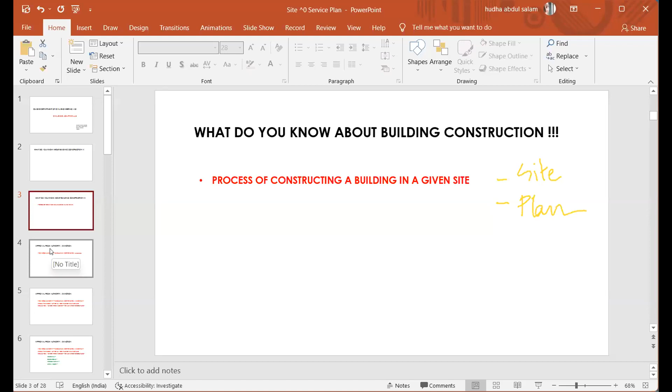Our drawing must satisfy KBR if the construction work is happening in Kerala. Yeah, if it is in Kerala, you need to satisfy the KBR. Now it is known as KMBR or KPBR. I will explain the full form. That is correct, okay, that much is correct.

So basically, you need to get the approval from your local authority. Whatever the local authority is, you need to get the sanction or approval from them. It can be panchayat or it can be corporation. In Kerala, what is the other one? Like one more thing other than panchayat and corporation. Do you know? It is municipality. Okay, so this is the local authority. From the local authority, you need to get sanction for the construction of your building.

In Kerala, basically in India itself, we have three kinds of local authorities. If the plot you are going to build on belongs to a panchayat area, you need to take permission from the panchayat. If it belongs to a corporation, take permission from the corporation. And if it is in a municipality, you need permission from the municipality. This is for a medium-sized small building. Depending upon the size of the building and its occupancy, you need to come up with other approvals also.

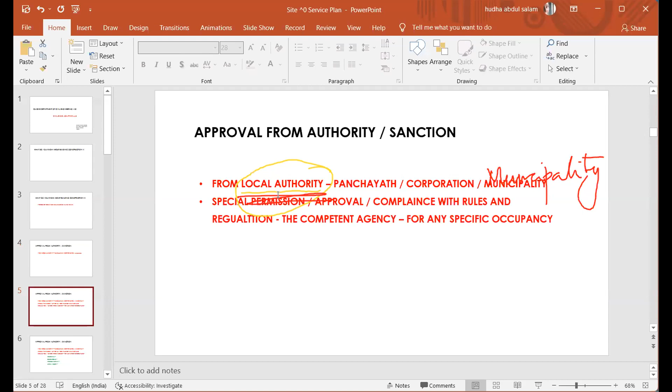Apart from local authority permissions, you need to take special permissions depending upon the occupancy. Any understanding about that? Have you heard about this thing before? Someone, anyone? Yes.

So you don't know, maybe. For a normal residential building itself, if it exceeds a certain limit of area, you can't directly take approval from the local authority. You need to go to the town planning department first. With a consent from the local authority, you need to take permission from the town planner, higher authorities. But then, depending upon the occupancy, your building should also comply with the regulations of that particular occupancy guidelines.

For example, if you are going for a residential building, it will be a normal local authority sanction, or maybe from a town planning department. If it is a villa or an apartment which exceeds a certain limit of area, you can go for town planning department permission.

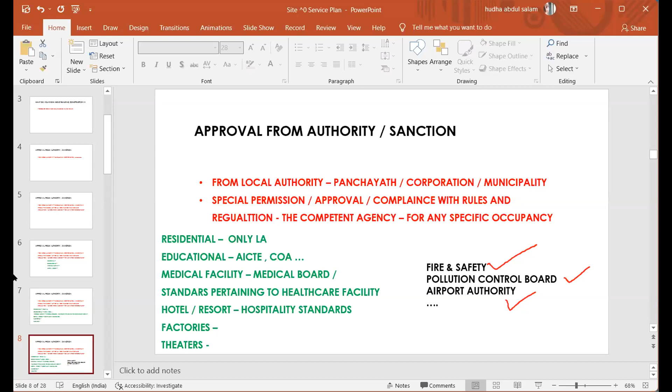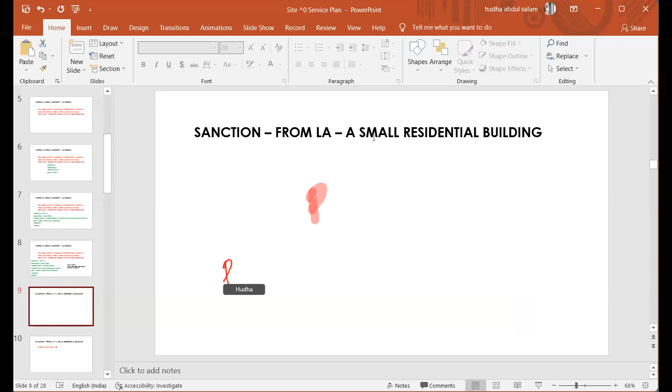So let us check what is needed for a small residential building from local authority. You just need it from the local authority. The local authority can be a panchayat.

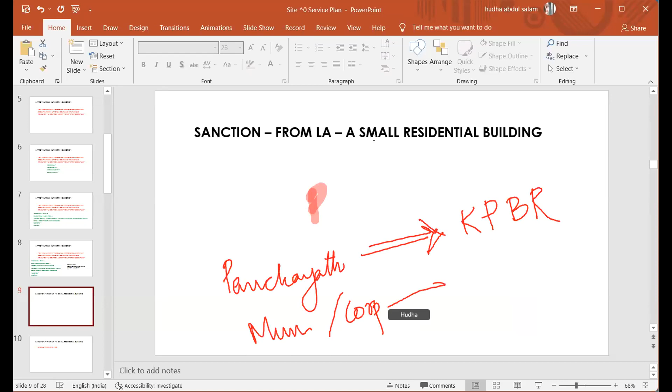You need to follow KPBR. What is KPBR? Kerala Panchayat Building Rules. If it is a municipality or corporation, you can go for KMBR, Kerala Municipal Building Rules.

And in the full form - usually before it was just KBR, Kerala Building Rules. But then in a later stage, they divided it particularly for the panchayats and separately for the municipality and corporation. So we do have two rules, KPBR and KMBR, depending upon the location of the site. If it is in a panchayat area and the local authority controlling that site is panchayat, you need to follow the KPBR. And if it is municipality or corporation, you can follow KMBR.

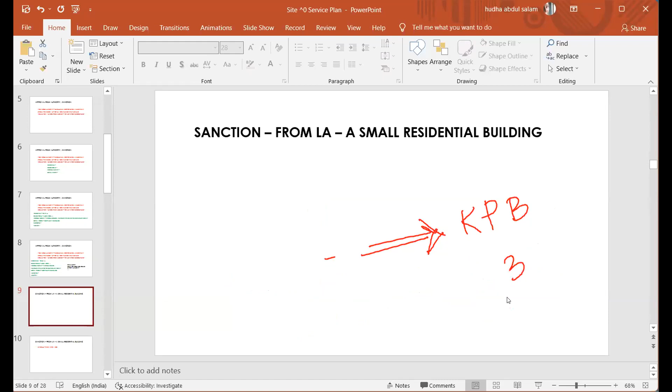And one more thing is there - it is the NBC. As it is within India, all over India, you need to follow NBC. NBC, the full form is National Building Code. The updated one - whenever you check the rules, whether it is KMBR, KPBR or NBC, whatever it is, you need to check the updated version of these rules. These rules keep on amending in between. So whenever you take them, make sure that you are taking the updated one, the latest version of rules.

So next question, we do have these different rule books. Are these rules all the same in all three? Actually, the answer is no. In some cases it will be same, and in some cases it will be different for different rules. So if you take any particular rule, you may have two different sets of rules in your two different rule books.

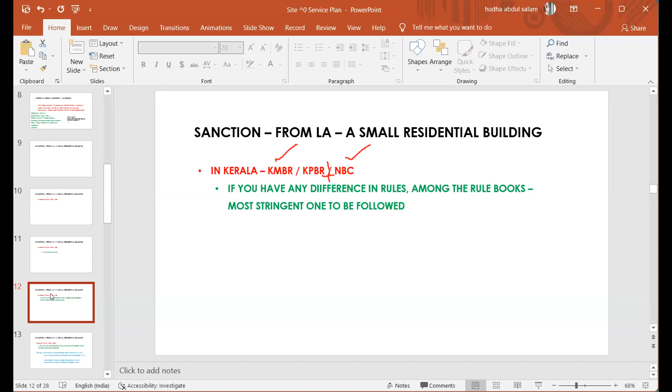In Kerala, you need to follow KMBR or KPBR plus NBC. These two should be followed in Kerala. When we take KMBR and NBC together, if there's some difference in rules, you need to go for the most stringent one. For example, this is not the actual rule, I'm just writing it down as an example. Minimum distance from side boundary as per NBC is given as 3.5 meters, and as per KMBR it is 3 meters. Which one will you follow?

As per NBC it is 3.5 meter, the minimum distance of a site. For example, if this is your site, this is the front boundary from the road, and you are going to place your building like this. So this is the minimum front setback, or the distance from the side boundary in the front yard. That minimum is given as 3.5 meters in your NBC, and 3 meters in your KMBR. Which will you follow? Which can be followed is 3.5.

I hope you understood the logic behind that. It is very simple. If you go for 3.5 meters, automatically you are giving minimum of 3 meters, so that it abides by the rule of KMBR as well. So whatever is the stringent rule, you need to follow that. And another example is about maximum, when we think of the maximum dimension or maximum thing given in a rule.

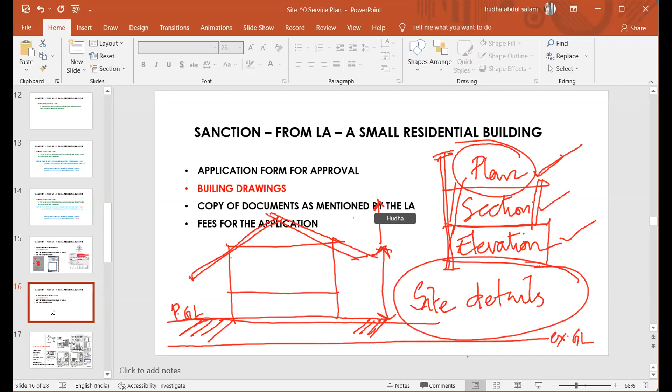This will be checked from your elevation. From your section, it will be somewhat similar to the elevation, but along with the ground level and heights, you need to show the foundation details. So we are now discussing the section. In the section you need to show details like the foundation details.

Heights obviously will be there in the section, because in floor plans you can't show the heights or the different floors. All these things will come in your section plan.

Heights, and specifications like whatever materials you are using for the building construction, such as the wall material, the roof material, the floor material, etc. All the specifications should be shown in your section, along with each floor height and the slab thickness in between. All these things will be taken from your section part.

So that is about your floor plans. Anyway, you need to show all of it, just excuse me for a second.

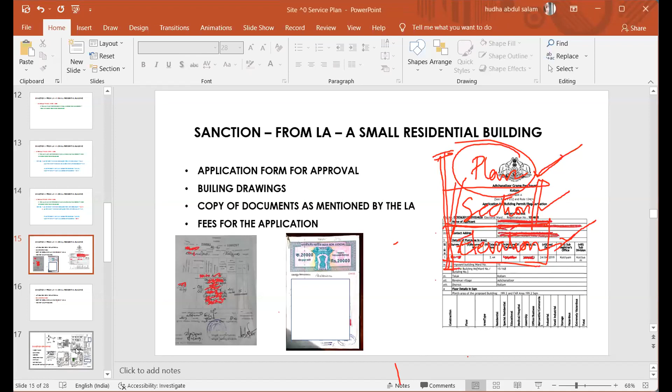Okay, I'm sorry for that, I've got a call. Yeah, am I audible?

Yes ma'am, okay. So it's about the plan, elevation, and section. All these things need to be there in your sanction file. Other than that, you need to show your site plan and services and details of your auxiliary structure.

So basically, you need to show all these details: floor plans, plans of your different floors with the openings, windows, everything with dimensions like this. Different floor plans, your elevation, then your section, and then you need to show the specifications.

Here the specifications are marked, then the foundation detail. In some cases, depending upon the secretary in the local authority who is giving your approval, they might ask for a detailed foundation drawing. In that case, you need to give an additional drawing with the details of your foundation.

Other than that, the important thing is your site plan, service plan, and the details of auxiliary structures and service structures within your site. So we can learn more about these two things in today's class.

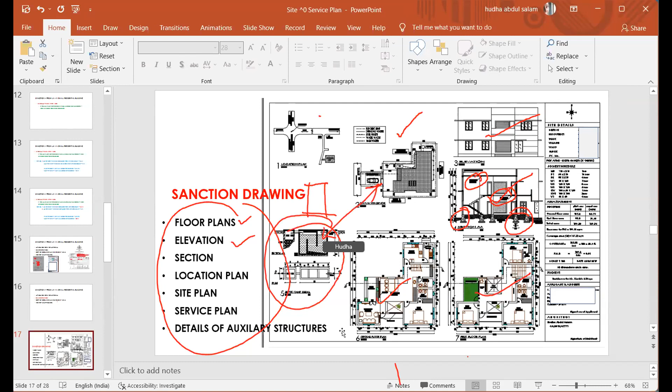Okay. So basically, what all things will be there in a site plan? Again, the site plan. What all things will be there in a site plan? Hello, someone please respond.

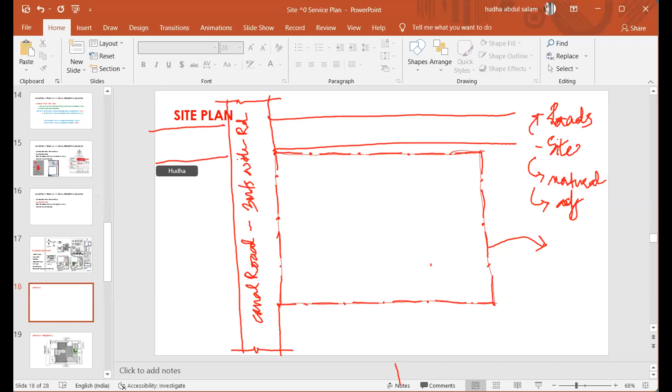Canal is going adjacent to your plot, mark that and mention that it is a canal. And if you have any name for that canal, name that also. For example, maybe Perandur Canal. That name of the canal can be named.

So with this, the basic thing about your site is done. Other than that, you have 2 more sides for your site, isn't it? You need to mark the detail on that side also.

Maybe I have a residential building adjacent to my plot on this side, mention that: Residence of Mr. so and so. And if there is another site here and the building is here, or maybe it is a vacant plot, you can just write vacant plot. And if possible, if you can collect the survey number of this vacant plot, just mention that also.

These things should be there. So your raw site is ready. And into that site, for making it a site plan, you need to add your building footprint.

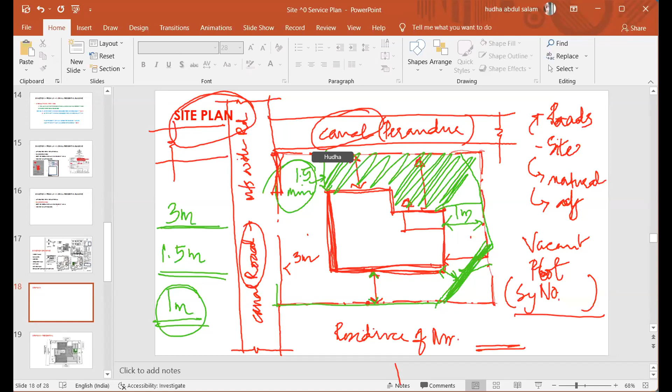So basically, within the site plan, you need to show your roads, whatever adjacent features are coming, then the proposed building plan. Usually, the roof plan will be kept, the proposed building footprint, and the setbacks from all the side boundaries should be shown.

If it is more than the minimum, what will it be like, let it be 1.75 meters, you can show that 1.75 meters. The actual should be shown, but then mark the minimums here. These are just the minimum. What is actually there in the site, that should be marked. It will be clear once I show you a proper sanction drawing.

And the adjacent properties, if it is a residence, that can be given. For a more accurate thing, you can give the residential number also, like this way we have given the survey number. This is not mandatory. In some cases, if the adjacent property owner is not willing to share the survey number or residential number, it's okay, leave it. But then you can just mark it as the residence of Mr. whatever.

So that is all about your site plan. Just quickly brush through the details of the site plan.

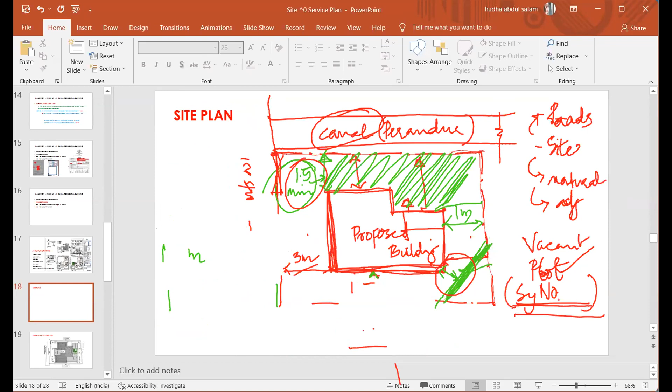Clear all options, sorry. So this was a site plan prepared for a small residential building. It is a single story.

Hello, somebody was asking something. Okay, this particular drawing is a combined drawing of site and service plan, so you could see a few things that we haven't discussed already. That will be there, we are going to discuss it in the next session.

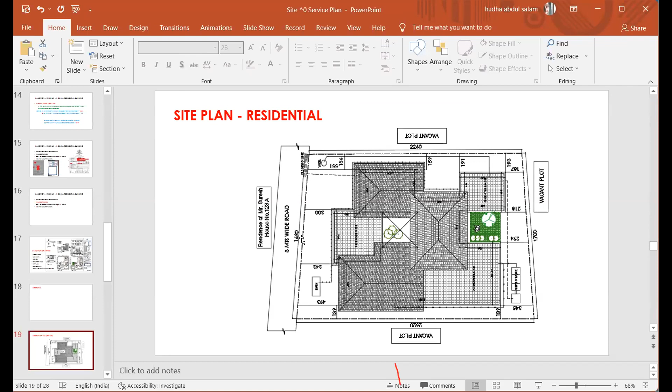I think I can open the AutoCAD drawing so that it is more clear and I can zoom into further details. One second.

Is it clear so far? Do you have any doubts in between? It's clear, ma'am, all clear.

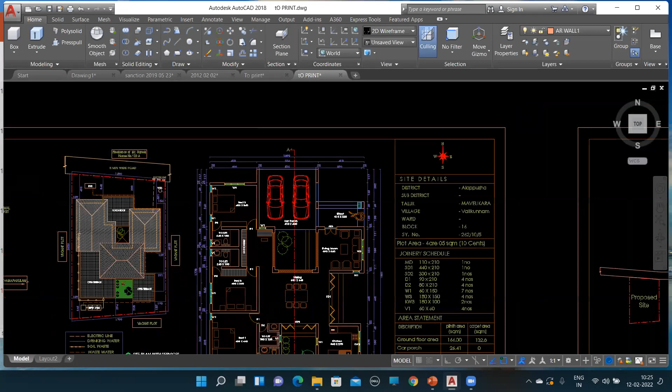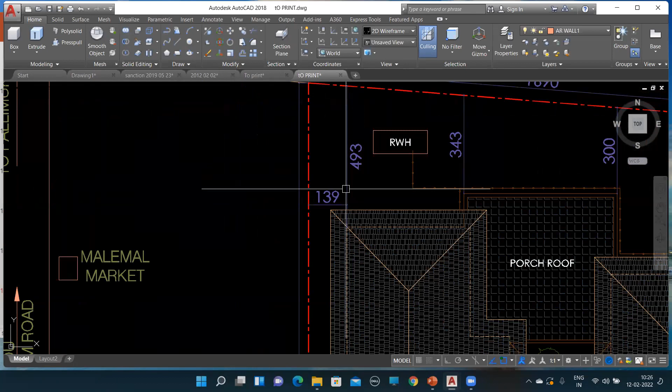So this is the plan I was showing. Again, you can see here—this is the boundary line, the boundary marking. 493 is the setback here, setback from the plot boundary. This is the road, a 3-meter wide road, and from that road you have 493 centimeters to your building. This is the roof plan I've shown in the drawing—the roof edge, the barana, the roof edge.

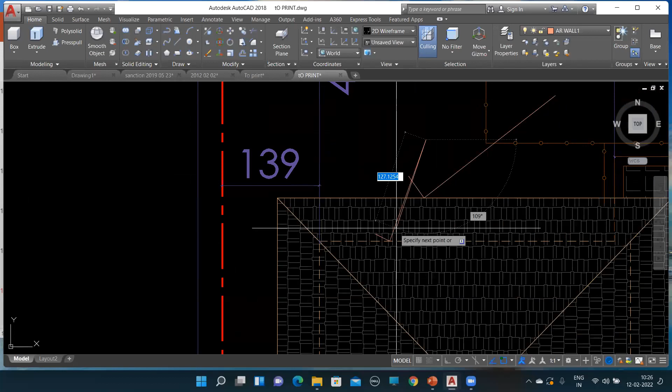But you need to show the setback from your building boundary—the foundation from that boundary you need to show. This is the foundation boundary, and from there you need to show the setbacks.

This is the site, the building boundary, and to take the building boundary, the dimension from your site needs to be shown. See here, the site is declining towards this side, so the dimension is also getting less. At this point it's 493 centimeters, here 343 centimeters, here 3, then here again 551. So the minimum is 3 meters. If you have a particular shape of site, or your building isn't simple—not having a single line at the front or side—the minimum distance towards the plot should be the minimum prescribed in your rules.

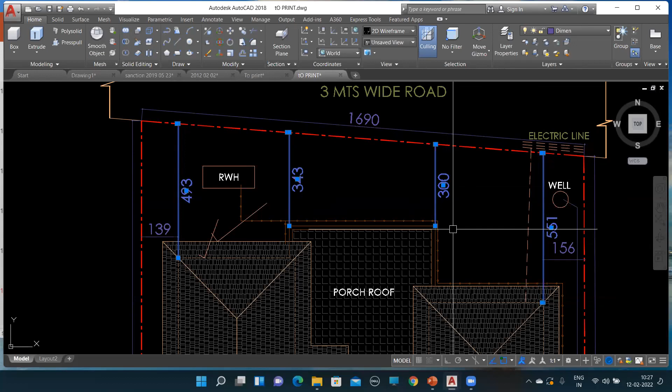This building was done a year or two back. At that time the minimum setback rule was different—it was 150. That is why I have given 156 here.

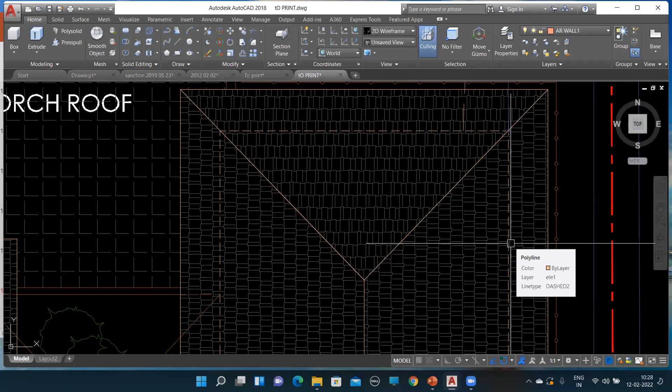Again, it is shown to the building boundary and not the overhang boundary. You can have the overhang beyond your building line—building line and overhang line. Building line is your wall line, and overhang line is similar to the protrusion of your shade. Here, as it's a sloping building with a sloping roof, you have the overhang beyond your building wall line, and in some cases this will be your shades.

Here you have the windows, and in some cases you might be having shades like this. That's a different case—if you have a shade like this, you need to take the measurement from this building line only. From this line only you need to take the measurement. Building line is the main measurement.

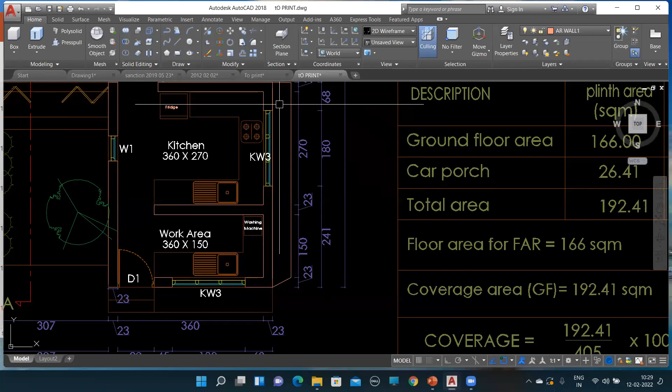So in this, I've shown the adjacent road—this is a 3 meter wide road. I don't have a name for this road; it's a small road just leading to 3 plots here, so I've just mentioned it as a 3 meter wide road. Just opposite to that, you have a residence, and you can mention the house number as well as the name of the owner there. On all other 3 sides there are vacant plots, so it's just marked as vacant plots. In a few cases, if you can get hold of the survey number, you can show the survey number also. Other than that, all dimensions towards your side boundary should be shown.

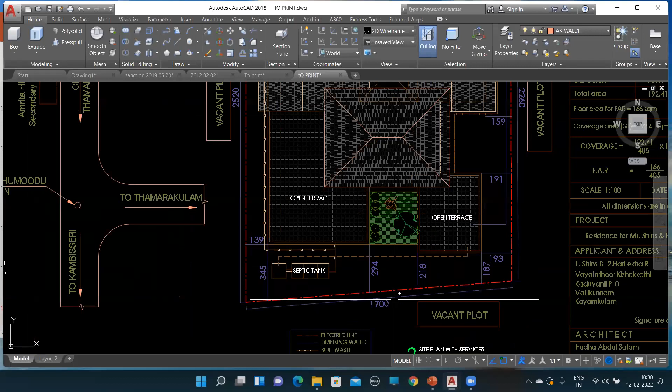In addition to the side boundaries, a few more things need to be shown—the building dimension also should be shown, end-to-end dimensions. This building dimension also needs to be marked. It's shown here, but as this is very small, it's not clear. All the building dimensions—not the overhang, but the clear building dimensions—need to be shown.

Basically, these are the things that should be shown in a site plan of a small building. The site should be there with the cardinal direction, then your roads or any other subsidiary things like canals or a bridge happening adjacent to your plot, then the adjacent plot details, then your building footprint or the roof plan, with dimensions—I forgot to tell you that, with dimensions, this dimension should be shown. Then place it appropriately so that you abide by the rules.

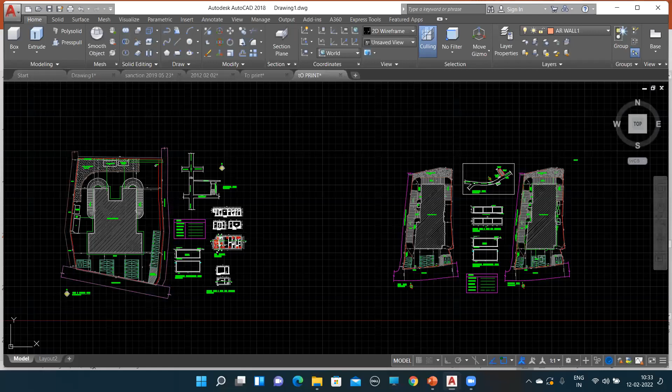This is again a site plan for an apartment structure. Other than your residential building, small residence, you need to show the parking spaces. And for residential, for apartment or maybe any high-rise building like offices or educational institutions, there are more things that are mandatory for a building to get approved.

Likewise, here you have a loading and unloading bay. You will get a clear idea once you read the KMBR completely, or the rule books completely. Then you will get an idea that you have loads of other names associated with the permission, a sanctioning process. Okay, here you can see it is known as the KK road.

So I have marked the road dimensions here and mentioned the name here, KK road. Likewise, you have shown the entry to the site and whatever is happening in and around your site. That is also shown, like the parking spaces. And this loading and unloading bay is mandatory for high-rise buildings, so I have shown that also.

Then the parking numbers, this is for the case of a high-rise building. Here the setback is different. That minimum 3 meters was for the residential building, but then the rule keeps on changing for different occupancy. I'm showing this so that you get an idea that the rule is not the same for all categories of building. As the height increases, you need to increase the setback into the site also.

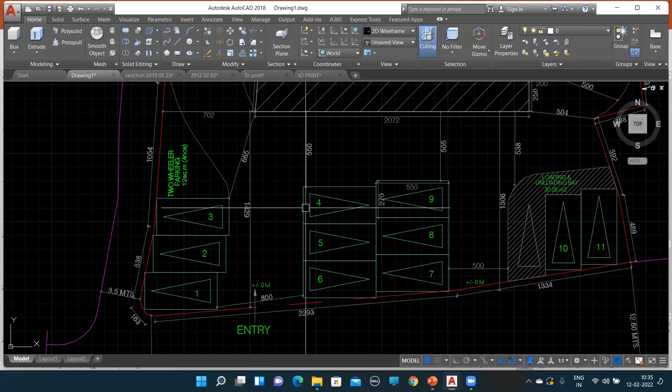Like in the previous drawing, we gave 3 meters as the minimum setback. But then as this is a high-rise structure, you need to have more vacant space in front of your building as well as on your sides. That is why I've given 15 meters here. 14.29 is almost equal to 15 meters. So depending upon the height of the building and many other factors, the rule changes.

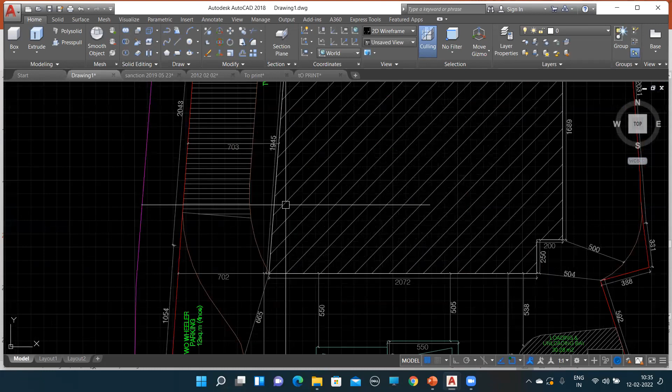So you have shown the driveway, this way the vehicle or whatever comes in goes, and you have the ramps. Usually for a small residential building we won't have these things, but then for a high-rise building like this, we have the ramp, so if you have a ramp you need to show that ramp also.

And another mandatory thing for a high-rise building is the recreational space, especially for residential buildings. So you need to show that recreational space. I have mentioned 170 square meters.

What is it? It is not just that you need to give a recreational area, but then depending upon the total floor area of the building, you need to have a certain amount of recreational area. As the area of the building increases, you need to give more recreational area, or if it is a lesser size building, you can reduce the area. So all these things are there in the rules. Depending on the rules only, we can provide these things. So you need to have a grip on the rule book and what is the mandatory open space required, or maybe what is the mandatory number of parking required. All this can be calculated from your rule book.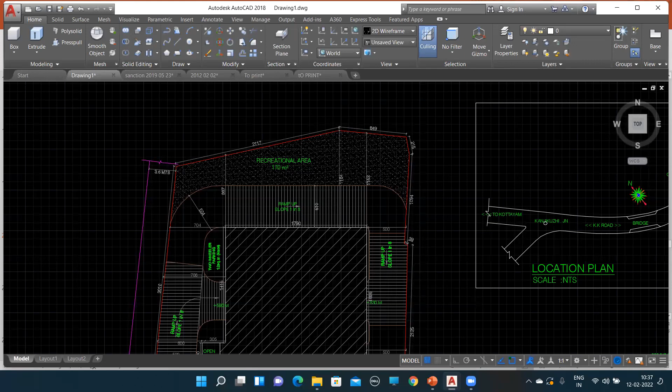Here I have mentioned loading and unloading bay. From where you get this 30.28 square meters? Again, this is there in your KMBR or KPBR. So you need to refer to those things for finalizing the required area for the different mandatory things that have to be there in your sanction drawing. Not only sanction drawing, you are supposed to provide these things in your building when you construct it. Only then will you get the permission to occupy.

See, you have the rainwater harvesting tank. Again, you have the capacity. This capacity is prescribed in your rule books, depending upon the size of your building.

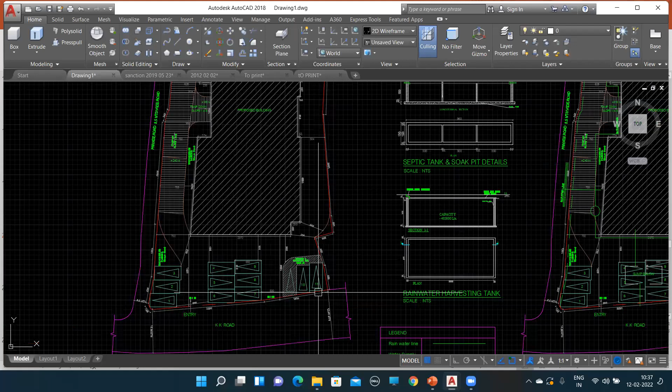Another insert I will show you. See, like this, the description: front setback is minimum 3 meters, and depending upon your increased height, you need to increase the setbacks accordingly. Then what is provided? Provided can be higher than the minimum requirement always.

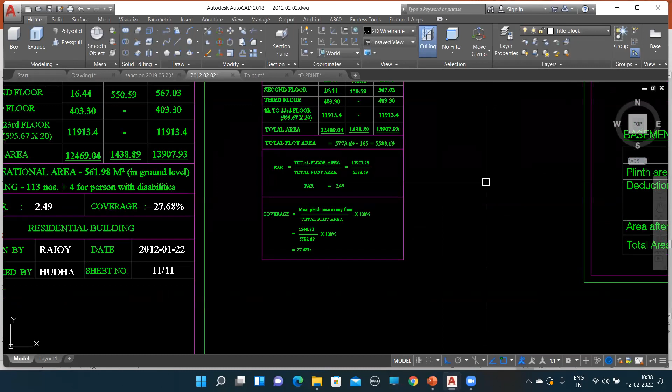So for the parking calculation, it is not feasible for me to explain each and every rule. Similarly, we have the setback rules, as well as the rule for selecting the size of the rainwater harvesting tank, and the amount of recreational space to be provided for a high-rise building. All these things are prescribed in the rule book. Whenever you design a particular structure, you need to check all the rules pertaining to that occupancy. If it is a small residential building, check all the rules and regulations pertaining to that small residential building.

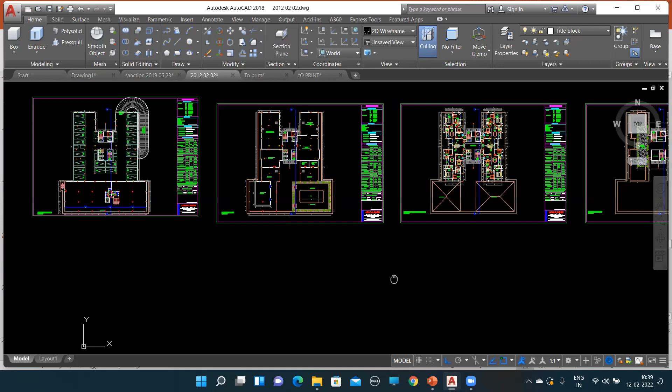So this is a kind of sanction drawing done for a high-rise building, and we can concentrate just on your site plan. So you have the site boundaries, and the dimension of the site boundaries is given. You have the building footprint, and it has to be hatched. You need to write it as the proposed building, and the setbacks from the boundary. See, 12.66 meters is away from the site boundary. I think by this you're clear about the site planning.

Then the next part is your service plan. Service plan is very much similar to your site plan. Whatever things we discussed already will be there in your service plan, like your site boundary. For the easier drawing, I'm just drawing it as a continuous line, but then you need to show the site plan and site boundary as a dashed dot line. This should be the notation for your site boundary. Then your road, or the access road, will be shown. Your entry to the site will be shown, then the dimension of the site, then your building coming within your site. All these things are there as we discussed in your site plan. The adjacent plot details, all these things need to be shown.

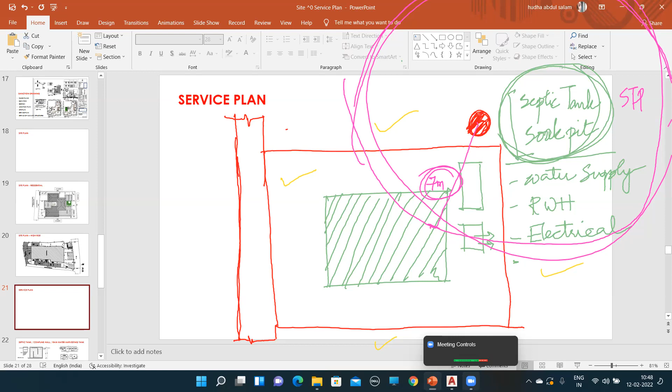So basically, for a small residential building, think of an ideal situation where you just have a few residences around. You only need to check the wells or borewells coming around your plot as well as your neighboring plots, and keep it away minimum 7 meters. The approval authority will come and check whether your septic tank or soak pit output is minimum 7 meters away from the adjacent well. The well can be there within your plot as well as your neighboring plot. Is that clear?

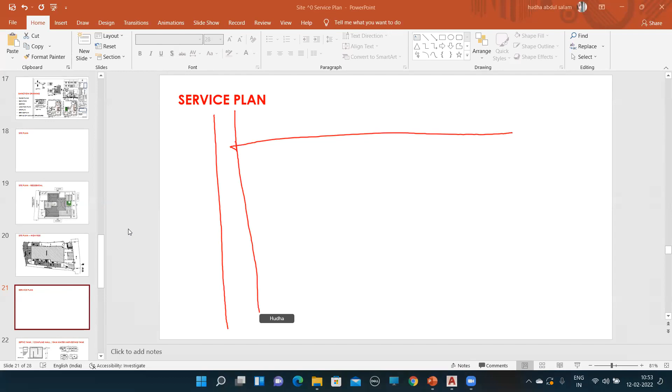So these are the things that need to be shown in your service plan. I just explained about your STP septic tank. The next thing to be shown in your service plan is your building and septic tank. Maximum away from your septic tank, you can have your rainwater harvesting tank.

When you keep this rainwater harvesting tank, usually it will be an RCC structure, and the seepage will be less - there won't be any seepage practically, I mean theoretically. But then ideally keep it away from the septic tank of your plot and adjacent plots.

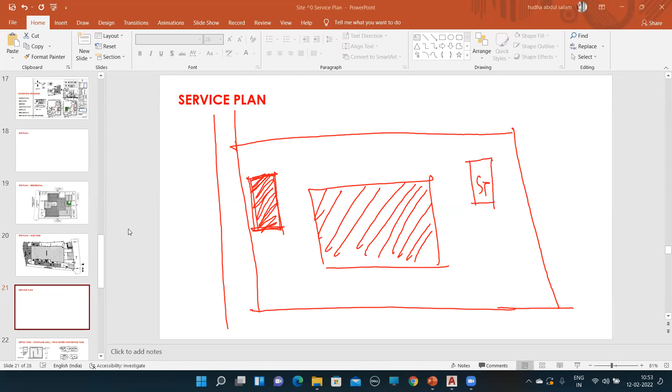If you have a water sump, if you have the drinking water facility from your corporation water, you can keep the sump also away from the septic tank of your plot as well as your adjacent plot. So you need to show the septic tank that we showed, then your rainwater harvesting tank. This is the rainwater harvesting tank.

Again, what is the capacity of the rainwater harvesting tank? You just check rule number 76 in your KMBR. It prescribes the required size of rainwater harvesting tank that need to be provided for each occupancy. Rule number 76 in your KMBR.

It is there - what should be the size of the rainwater harvesting collection tank for any building. For different occupancies, you need to have different size rainwater harvesting tanks. Change in area also changes the capacity of the tank. For a bigger building, you need to have a bigger size tank. This capacity you can calculate from the rule book - rule number 76 describes about the capacity of rainwater harvesting tank.

Other than rainwater harvesting tank, this is not a mandatory thing, but then you can give a sump also. If you are giving a sump, you need to show that in your service plan. Otherwise, if you're not providing a sump, you don't have to show that - it is not a mandatory thing. But then, if you're providing a sump for your particular building, you need to show that in the service plan, and the capacity also should be shown for the rainwater harvesting tank, as well as the sump, you need to show the capacity.

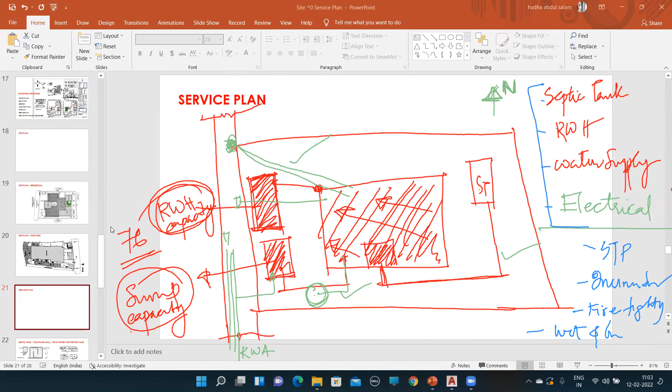But just understand that this is not the end of services like septic tank or rainwater harvesting tank, water supply and electrical. These 4 can be shown in your residential sanctioning, but this is not the end. You have a list of services waiting for you if you are dealing with a bigger size building.

So from all this we can move to a typical drawing for a septic tank, the auxiliary structures. All these things can be named as auxiliary structures. The auxiliary structures in the basic drawings. These are just basic drawings. Can you see the septic tank drawing?

STP I'm not explaining, it's so confusing. I got this from a consultant. Usually if you have STP or that kind of bigger incinerator treatment, STP is for a different purpose, incinerator is for a different purpose. But if you have high-end services, waste disposal services, definitely you will have a consultant for that and they will give you the detailed drawing. When we say consultants, since you are from the civil engineering background, isn't it, from the civil engineering side only we have lots of specializations coming in. From your masters also you can do, like plumbing specialization, MEP - mechanical, electrical and plumbing specializations. They will provide you with the drawings required for the particular building, and the capacity-use specific drawing you will receive from your consultant. Maybe at some time you will be the consultant also.

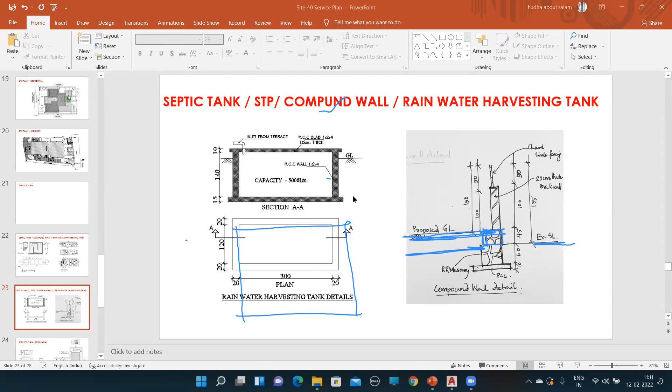So with that, we came to an end about your site plan also, like all the things that we need to add in a site plan. Is that clear? Once the completed site plan is ready, you can start, so that will be more clear.

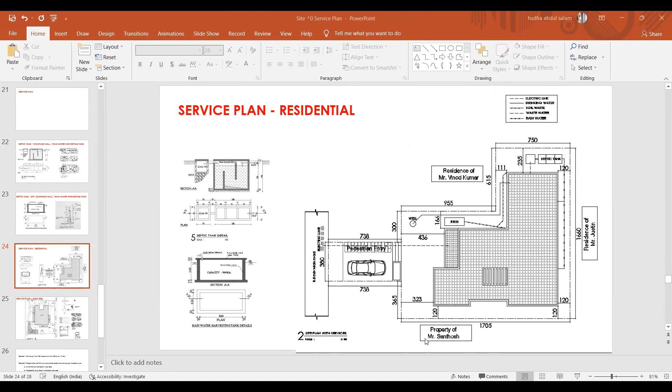Similarly, if you have a small septic tank, you can provide both STP and septic tank—the septic tank can be used for a few rooms or something. If you have that, you need to show it in the service plan as well as the detail. So this is all about your high-rise building detail, just an insight into what you need to expect.

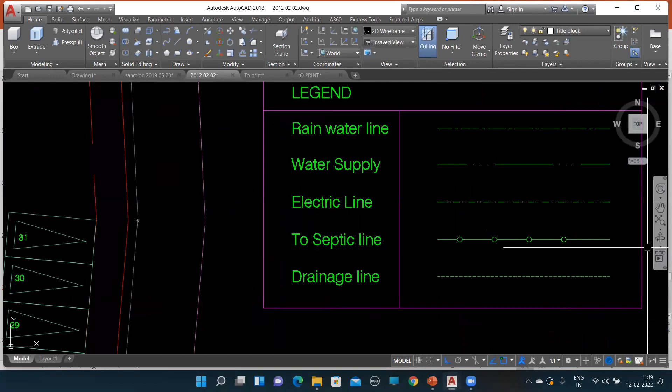Same notation is used here. Then you have the rainwater line, denoted like this: dash, small dash, bigger dash. You have that connected to the rainwater tank, harvesting tank. Then you have another sump below. From the sump, you have the drinking water or water supply, which has another notation.

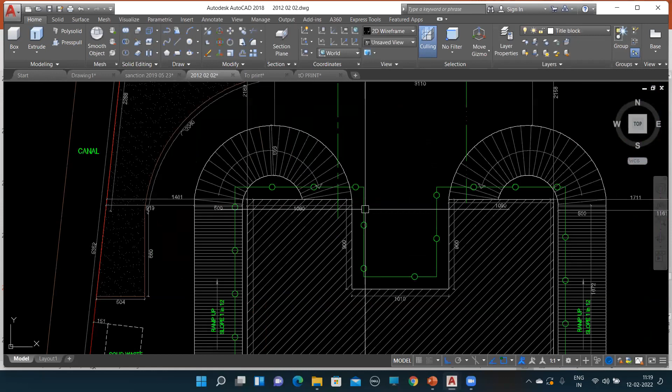The drainage line majorly has the normal wastewater that will be connected to... sorry, I think it is not shown, but you have to show the drainage line. This is only the surface drain. Whatever rainwater comes on your surface, you have the drain connected to that. That is why it is connected to the external drain. Only the rainwater, the surface runoff, is connected to the canal.

Here you have the canal. Other than that, you can't connect the treatment water into the canal. That is against it. So I hope it is clear.

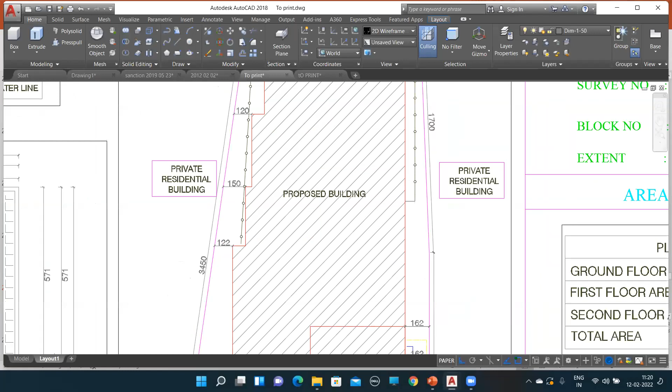Again, this is another small residence. You have the rainwater tank connected to the building. You have the septic tank and soak pit here, again connected to the septic tank and the soak pit.

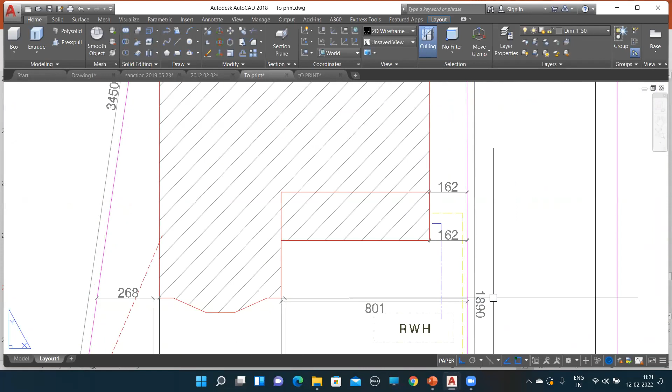You have the electrical post, a line from the post going into the building. This is the water supply line, this yellow color one, and we have another connection from the water supply line to the building. At minimum you should show the KWA line, rainwater line, electrical line, and wastewater line.

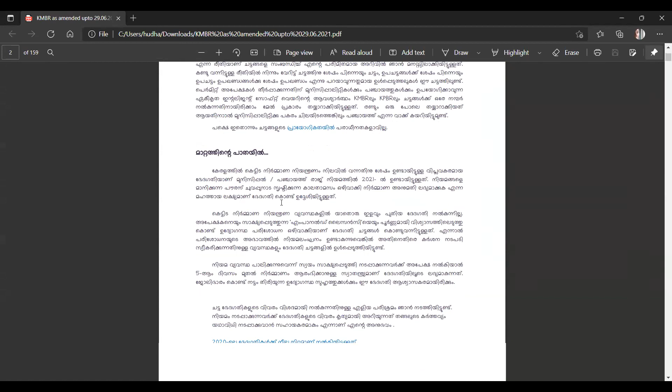Okay, inside that, this is the preface from the author who compiled this one. This wasn't released as a printed version; by his own interest, he has compiled the amendments. That's it. So you have different chapters, all these are there in the KMBR.

You have different chapters. Chapter 1 will deal with the definitions. Chapter 2 with the drawings, permits, occupancy certificates, and other rules. You have chapter 3. Again, as I told you, for the easiness of teaching I have selected the easiest site, a rectangular site.

Other than rectangular sites, you will come across different shapes of sites, very small sites, all these things, so there are special provisions for some kind of special sites. That is also mentioned in your KMBR.

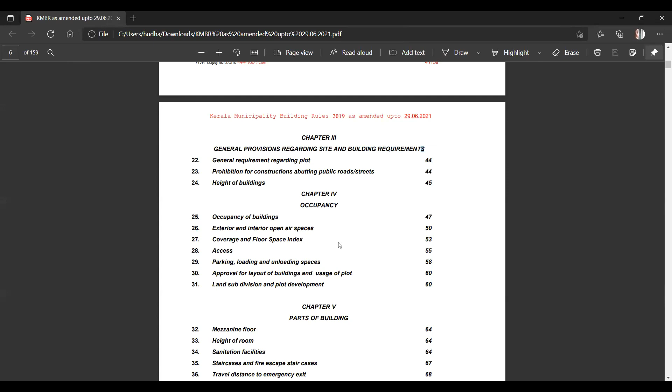And for different occupancies, again I was mentioning occupancies, isn't it? Like educational, institutional, and other occupancies in the agenda. Different occupancies, different rules, depending upon the occupancy the rules keep changing. Other rules are there in your chapter 4, occupancy.

This explains different parts, and within different parts they explain it for different occupancies. This will also differ from different occupancies. If you have a smaller plot, you have relaxations, lots of relaxations when you consider construction in a smaller plot.

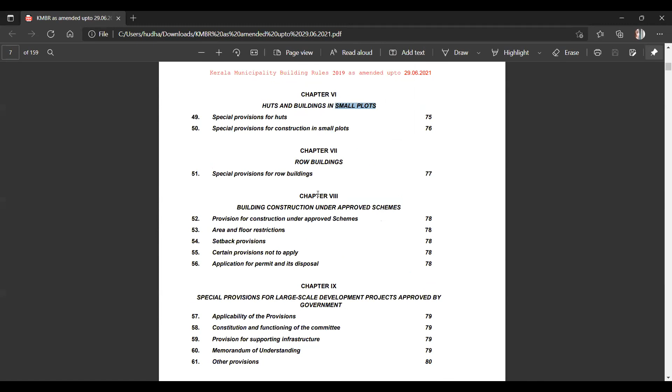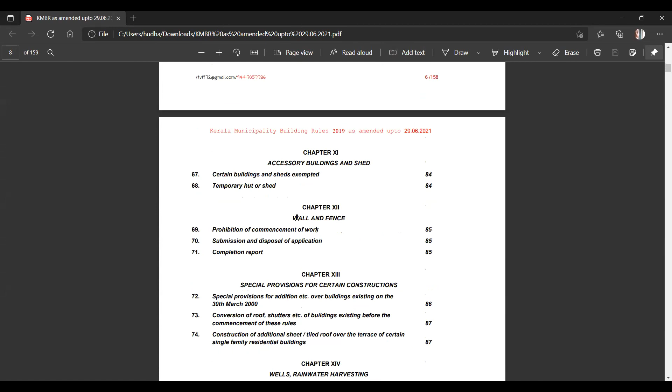If you want a wall or a fence, for that also you need to take permission. Here are the rules for wells and rainwater harvesting. In this portion, they explain about the size of the rainwater tank or the capacity required for the tank.

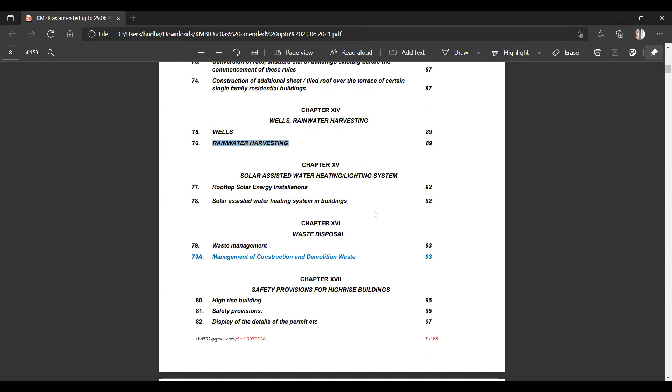This chapter deals with solar assisted water heating. It is not mandatory, but these days it has to be there, isn't it? Under the descriptions, for residential buildings it is not mandatory. Then there's the waste management section.

This category you don't need to see right now, but in actual practice you need to come up with these things also, like high-rise buildings. Whatever rules are prescribed for any particular occupancy should be there. In addition, if your building comes under the high-rise category, you need to abide by the rules mentioned in this chapter also.

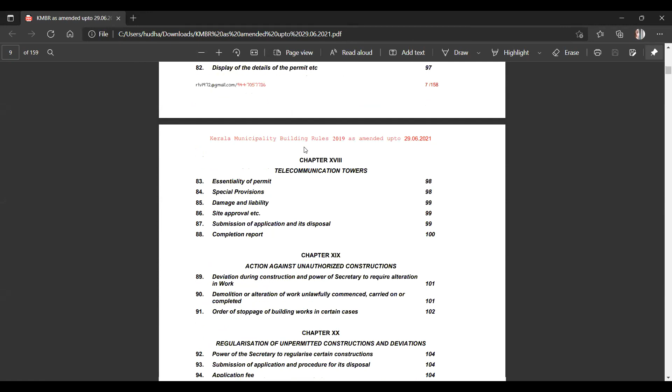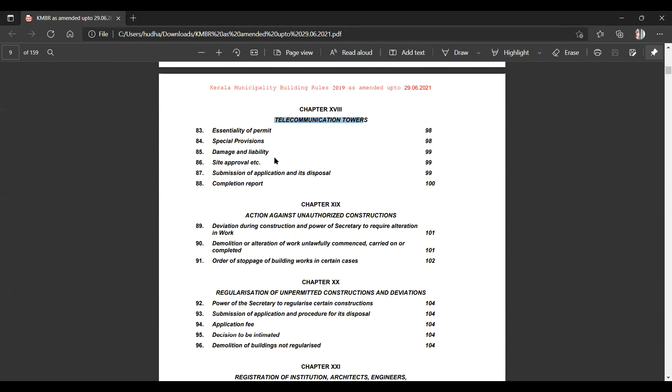Then this is not for the building, but for communication and telecommunication towers. If you are designing that, what all things need to be addressed or checked will be mentioned here.

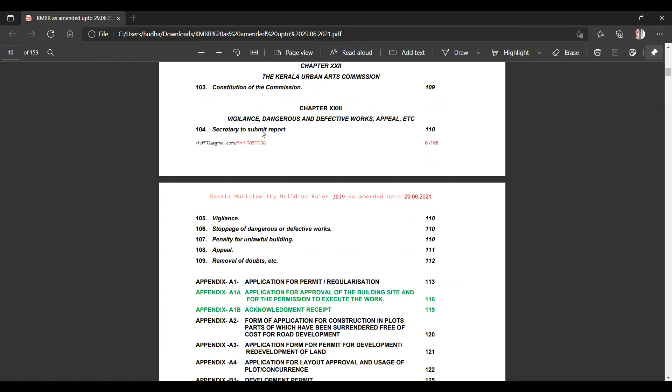Then these are the actions that you may have to face if you go for an unauthorized construction, or if you violate any construction rules. These are the actions you need to face.

So this is the content of the KMBR. Now for the rule check, I'll just show you one or two things about how you can check the rules.

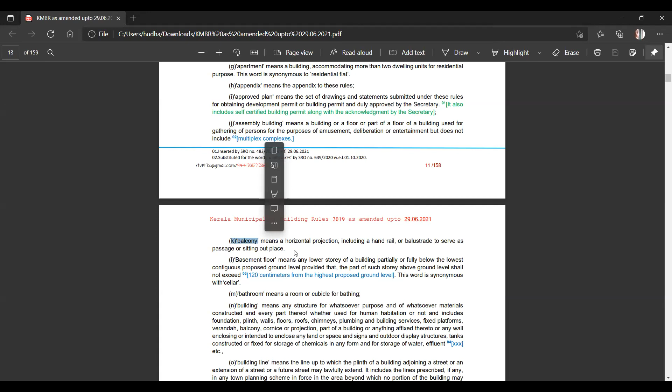The definitions of bathroom, toilet, toilet minimum - okay, all these things you will get a clear idea about.

The layman's usual practice terms and the KMBR prescribed terms will be different. That you need to check.

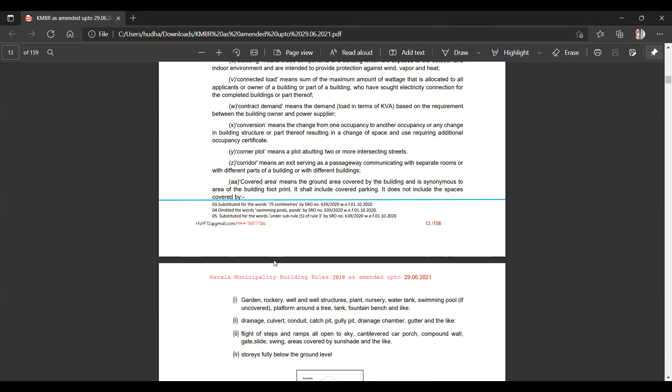What is a cul-de-sac? Cul-de-sac is a street which has a dead end. The road which serves a very small group of sites, a very small group of buildings, is known as a cul-de-sac. It won't have that much length usually. It can have length, but usually it will be very short, having a dead end.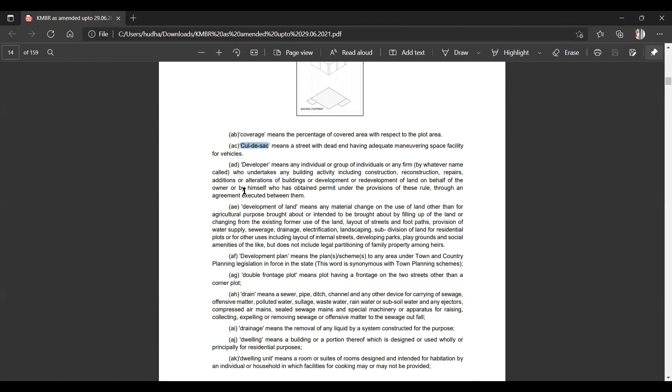It's known as a cul-de-sac. It never goes and attaches to another road or anything. It will have a dead end towards a plot or a building or something.

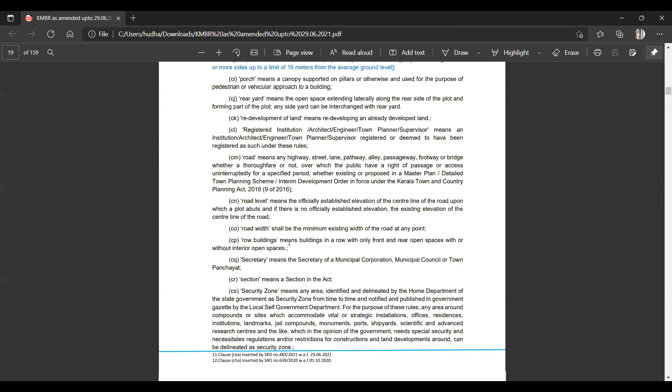Terminologies you can have an idea from this one chapter. I suggest you have a clear idea. Even if you can't memorize it, just go through it so that you know it is mentioned somewhere, so you can come back and check.

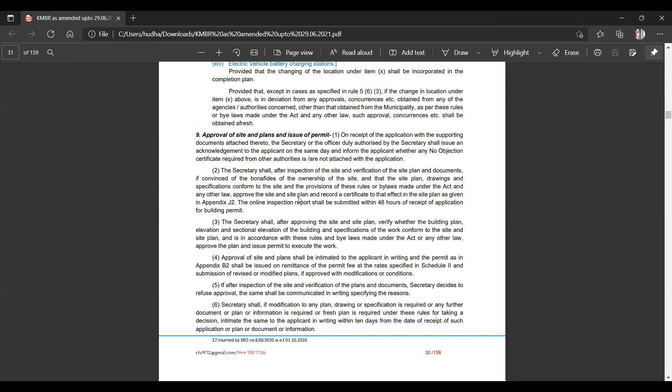You go through the terminologies, and this explains about the essentiality of getting a permit and everything. Also, the responsibility of each and every person - the client, the engineer, and everyone's responsibility - is mentioned.

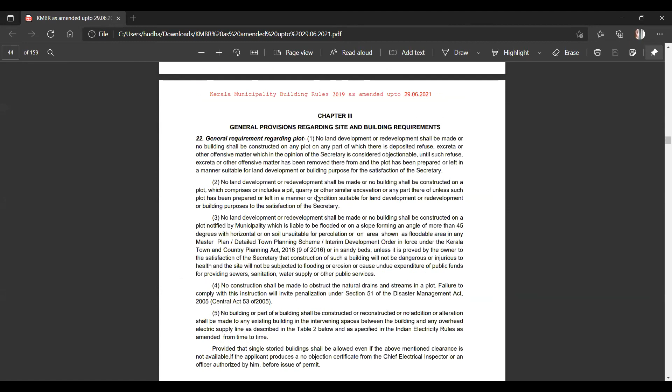When you check the building rules, I think you can start from here. I think it's beyond 2 hours, so I'll just briefly explain this and stop here.

Okay, so what occupancy is residential occupancy - usually, other than that you have group J. First you need to check the occupancy, the group. If it is residential, it comes under group A1. Now you need to check the rules for group A1, all the rules pertaining to group A1.

If you have an office building or design, it is group E. In that case, you need to check the rules for group E. The first step is understanding which group your occupancy comes under. After that, all the rules related to that group can be checked.

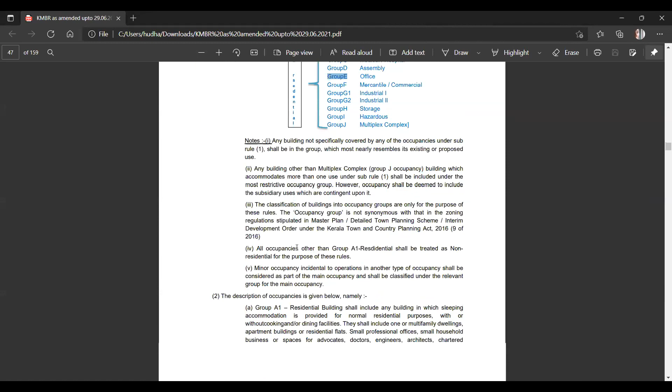The first checking may be the exterior and interior open spaces. As we said earlier, if it is for an office space, it is group E - buildings in group B, C, and E up to 200 square meters.

You just check the criteria. If it is up to 200 square meters, you can check the setbacks and open spaces in this table: 5 meters in front minimum, rear 2 meters minimum, and all sides 2 meters minimum.

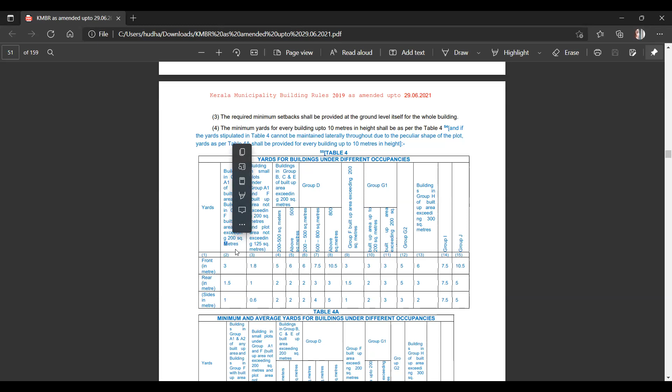If it is beyond 200 square meter, the rule will change. This is exceeding 200 square meters, and this one is not exceeding 200 square meters.

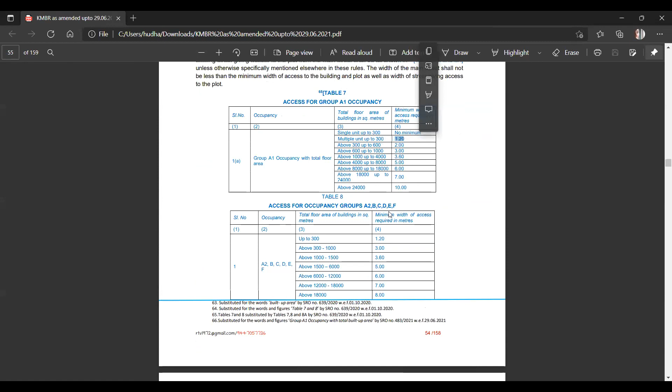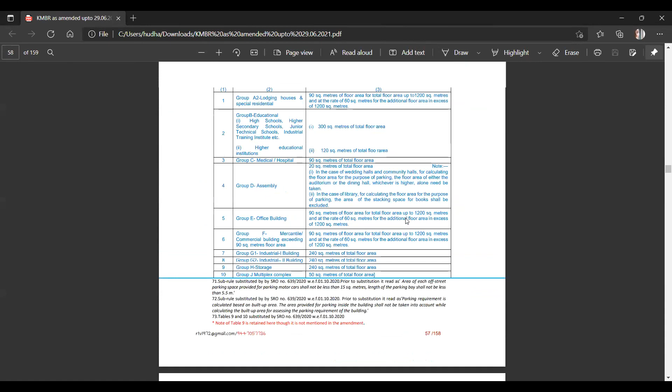We cannot study this in such detail now. This is for the parking facility. I will share this PDF also, you can just go through that.

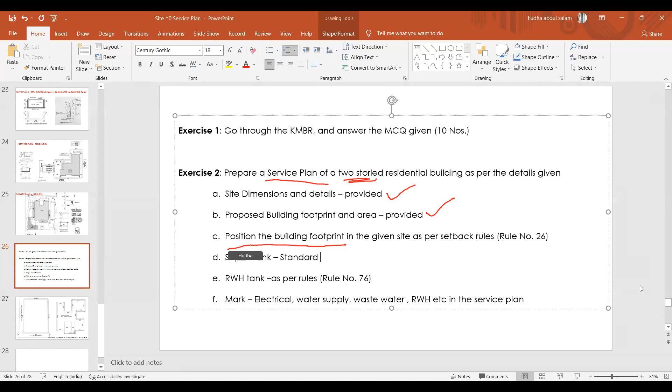If you need to position it, you need to fix the setbacks, the minimum setbacks. For that you can check rule number 26, what is the rule pertaining for a small residential building.

Then you can draw the septic tank detail for a standard residential building, then a rainwater harvesting tank, but you need to find the capacity so you can check this. Then in the service plan, just mark all these things: electrical, water supply, wastewater, rainwater harvesting, etc.

And this is your site plan, the dimensions, and this will be the footprint of your building. Easy, just the outer line only needs to be drawn.

Then you need to place this inside. The scale is different, that is why this is bigger than your site, but when you draw it to actual dimensions, it will be smaller. So you need to redraw this into the site.

Using the dimensions, you can just take this into the site. So when you convert it into the site, you need to check with the minimum setbacks. You can check those minimum setbacks and take this into the site and position your services, your septic tank.

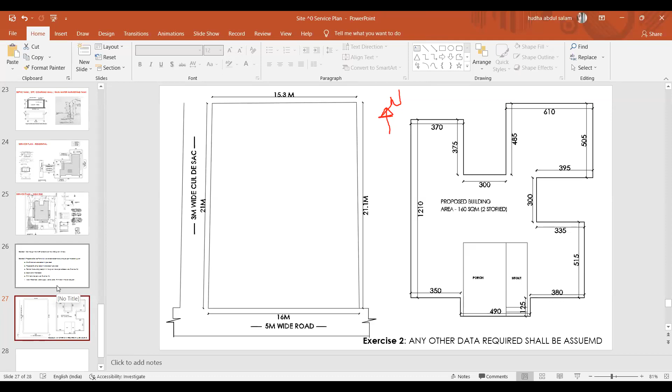I hope it is clear, your exercise 2. Exercise 1 will be direct questions from the rule book, multiple choice questions directed from the rule book. Hope it is clear.

Hello. Hope the question is clear to the students, how to do the exercise.

I think I took 10 minutes extra, sorry. Okay, that's okay, you've done an excellent job, Huda.

Students, if you come up with any doubts while doing the exercise or reading your rule books, feel free to message me or contact me so I can help you with that. Monday onwards I will be in the college, you can come and meet me and ask. That is also fine.

I'm sure you will come up with doubts once you start reading it. You do a 1.5 to 2 hour session, it is not enough for you to get an understanding about the rule books and checking them. What I wanted was just to give an insight that these things are there, and you are supposed to check these things when doing the sanctioning process.